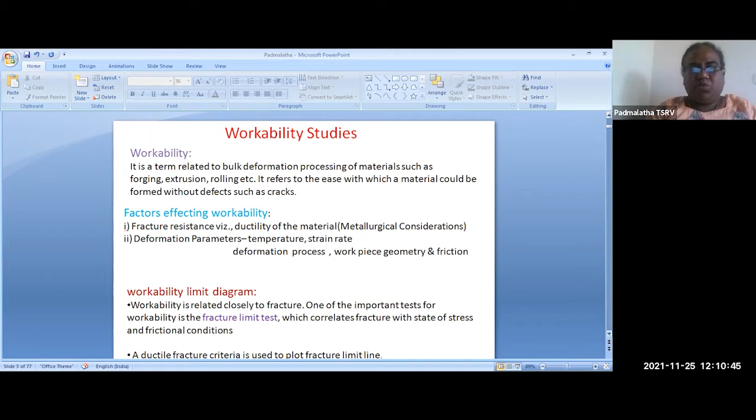So what we can do is keep some of the parameters constant, and check the workability of the material using a diagram called the workability limit diagram. The other name for workability limit diagram is the fracture limit diagram, because workability is closely related to fracture. We'll see how this workability limit diagram came into picture.

Workability diagram, or workability limit diagram, or fracture limit diagram, depends on a ductile fracture criteria. I will read it out and explain. This is the ductile fracture criteria given by Atkins. According to this criteria, it states that there exists a unique correlation between the tensile fracture strain and compressive fracture strain for a given material at room temperature. First I will explain this.

We have a material here. When you are compressing the material, it undergoes two types of strains: circumferential tensile strain and compressive axial strain. The circumferential tensile strain is called the hoop strain, and it also undergoes the axial strain. So the body is subjected to two types of strains, and when this body undergoes such deformation, it usually undergoes a non-homogeneous deformation.

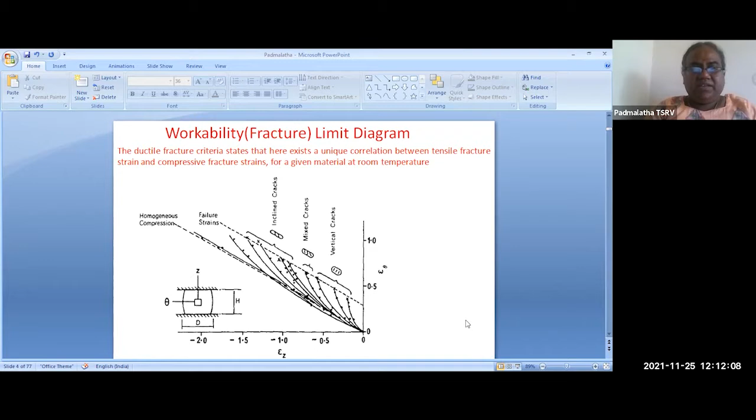So when it is undergoing such non-homogeneous deformation, the strains that the body undergoes also depend on its geometry. So why we are interested in geometry is, as we are changing the aspect ratio, the fracture conditions also will change.

It may undergo brittle fracture, it may undergo a mixed fracture, or it may undergo a ductile fracture. So as we change the aspect ratio of the component or the part, the fracture conditions also will change.

So for a given material at room temperature, if we keep changing the fracture conditions and plot all those fracture strains, where the y-axis is the tensile strain and x-axis is the compressive strain, we see that all these fracture points are forming a straight line.

That means there exists a unique correlation, a slope, between the tensile fracture strain and compressive fracture strain for a given material at room temperature.

So this line will help us. When we join all these points, we call this line the fracture limit line, or workability limit diagram. This line helps us in many ways. We'll now see its applications.

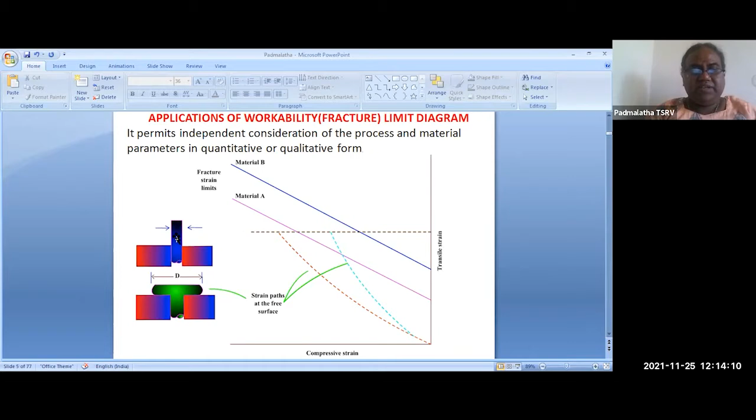We have a bar with us. This bar I'm subjecting to some compressive forces and some riveting operations. Say some riveting operation has taken place, and this bar is of a material. Before that, I want to tell one more thing.

These lines are all touching the fracture points. That means if the material is strained above this line, it will surely fracture. If the material is strained below this line, the material is safe. So it is a limiting line. Above this line means the material is unsafe, below this line means it is a safe domain.

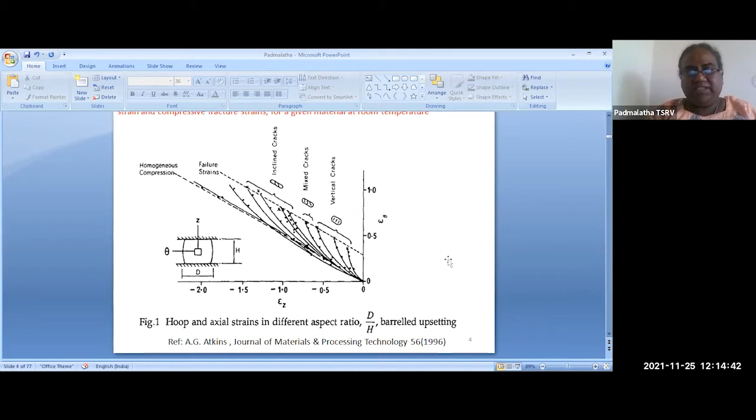Below this line we can strain the material, above this line we should not strain the material. Keeping that in mind, we'll go for this.

So here, when we are subjecting it to compressive stresses with some riveting operation, it undergoes two types of strains: one is the circumferential tensile strain and one is the compressive strain. Let us say during this operation the material undergoes a maximum tensile strain of this much.

Say this is the line which the material will undergo. We have assumed that this material is material A, and this purple line we are seeing is the workability limit diagram for material A.

Now you can see that when we have used material A, it is crossing the line. This horizontal line is the maximum, or the limiting, strain which we have given to the material.

So when we are using material A, we can see that the limiting or threshold strain the material is undergoing falls under the unsafe zone, because the area above this line is unsafe and the area below is safe. The maximum strain it undergoes falls under the unsafe zone, so we cannot use material A.

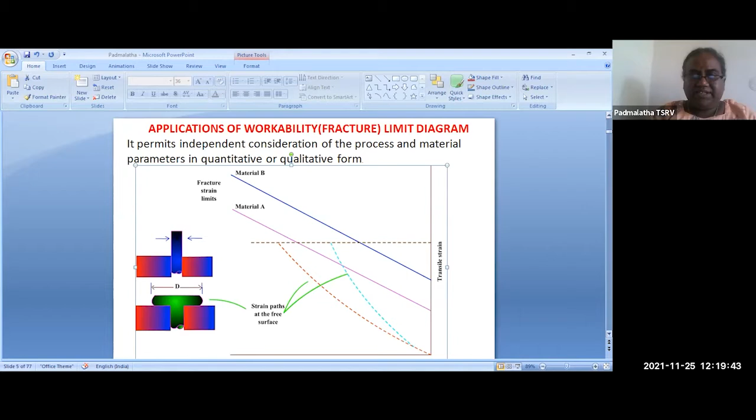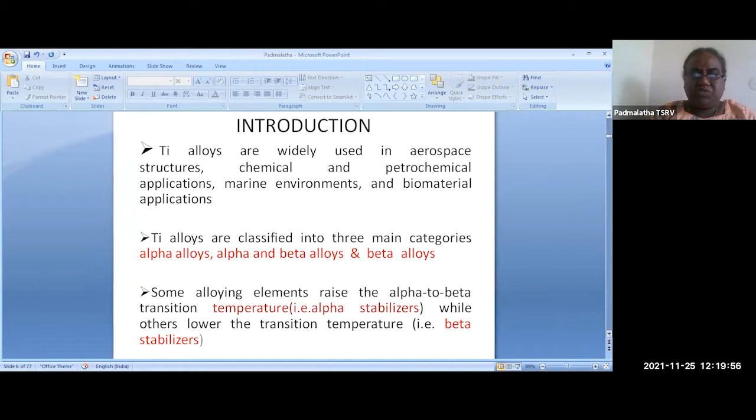And before that, I have worked out on metastable beta titanium alloys. This is the material I have chosen for my PhD work. So as a case study, I want to show you.

Mainly this titanium, like our steels, iron, exhibits a property called allotropy. Allotropy property means what? One metal exhibits two different microstructures - that is called allotropic nature. So some materials in nature will exhibit this, like iron, titanium, cobalt, and nickel. Some elements will exhibit such nature. For titanium, it exhibits HCP structure up to a temperature of 883, and above 883 it exhibits a BCC structure. BCC structure we call it as beta phase, and HCP structure we call it as alpha phase. This is for pure titanium.

So the transition temperature will change as we keep adding the alloying elements. Like steels, as they exhibit a different allotropic nature, we could make different types of steels. Likewise here, as titanium is exhibiting this allotropic property, we could make different types of titanium alloys. That means we can add alloying elements which will stabilize the alpha phase even at high temperature, and we can add BCC beta stabilizing elements which will stabilize the BCC even at lower temperatures. So by adding these alloying elements, what they do is they change this transition temperature.

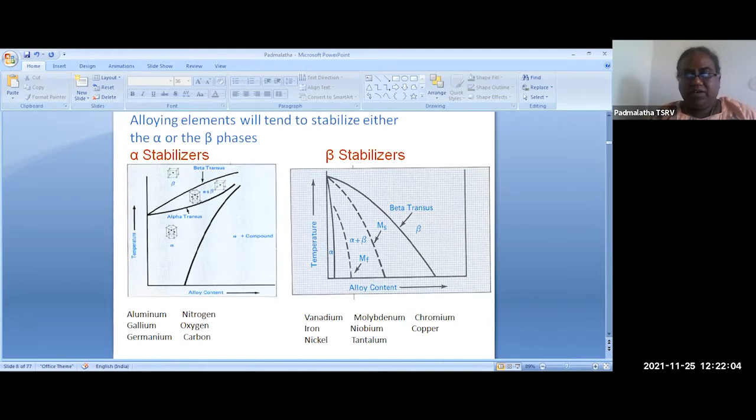So if you are alloying with alpha stabilizers - alpha stabilizers are mainly aluminum, gallium, nitrogen and oxygen - and beta stabilizers are vanadium, molybdenum, and chromium. If you are adding alpha stabilizers and getting the alpha microstructure even at higher temperatures, we call it alpha alloys. And if you are adding both alpha and beta stabilizer elements, and we can see both phases, it is called alpha plus beta alloys.

And if you are adding the beta stabilizing element, approximately 30% by weight, so that we can see even the beta phase at room temperature, those alloys we call beta alloys. And my work is on metastable beta alloys. Why we have taken this alloy is, here the beta alloying elements are added in the weight percentage of 10 to 15%.

But here we are using a term called metastable. Why metastable - though we are getting a beta phase, which is a high temperature phase, though we are able to get the beta phase at room temperature, it is metastable. That means if you give time for it, if you age it, again the alpha phase will try to precipitate in the beta matrix. This precipitation process actually gives the strength and hardness to the material, like precipitation hardening. This is one of the mechanisms which gives strength and hardness to the material.

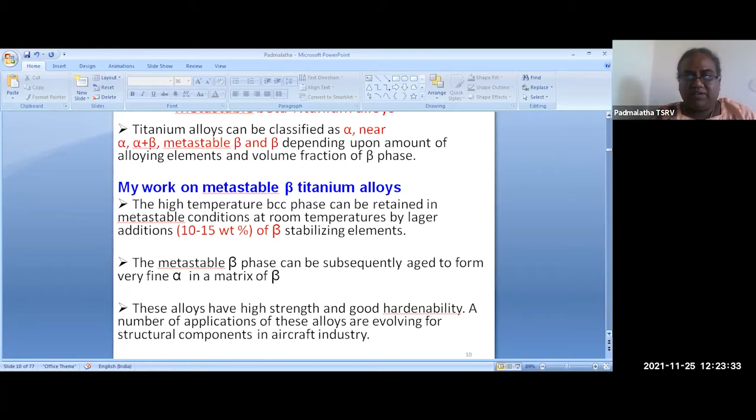So here my work is on beta alloys. Already these beta alloys are discussed in detail by scientists from DMRL, so we'll not go into it, but we'll mainly focus on workability and hot working behavior. So these are the alloys - I have taken 2 alloys, okay, we'll focus only on titanium 5553, which is a metastable beta titanium alloy.

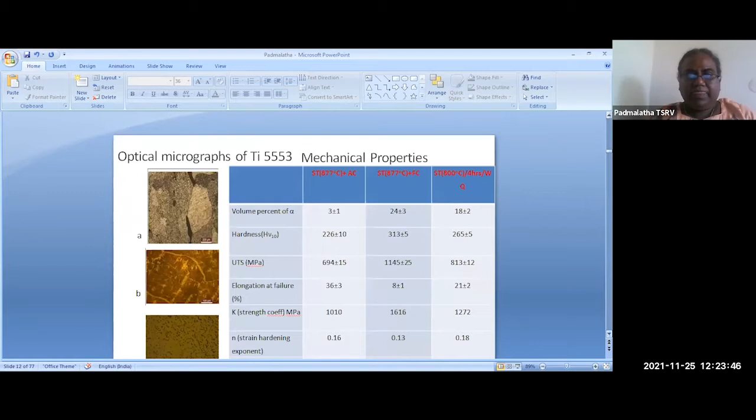I have subjected the same alloy to 3 different heat treatment conditions. By subjecting it to these 3 conditions, we can clearly see how the properties are changing. As we all know, by the annealing process, that is furnace cooling, the material usually becomes soft. But in this case, the strength of the material is increasing.

Why? Because during furnace cooling, we are giving enough time for the alpha phase to precipitate into the beta matrix, since this is a metastable beta alloy. So the beta will not remain as it is. Slowly the alpha phase precipitates into the beta matrix, which gives this much strength to the material.

Why we have taken these 3 conditions is just to check the workability. We have taken 3 different conditions, but we mainly focus on workability.

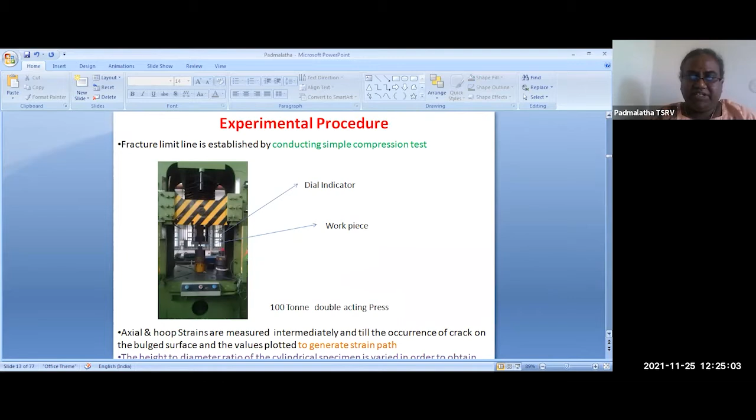So we came to a conclusion that we have to plot a workability limit diagram. For plotting the workability limit diagram, we need to perform a simple compression test at room temperature. Here we can use any press, any single acting press is okay.

What we have to do is press the material till it gets cracks, and we should not continuously press the material. We should compress it in intermediate stages, because each time after a little compression, we have to take it out and measure the hoop strain and axial strain, then keep it again, and again measure the hoop strain and axial strain, till the material gets fractured.

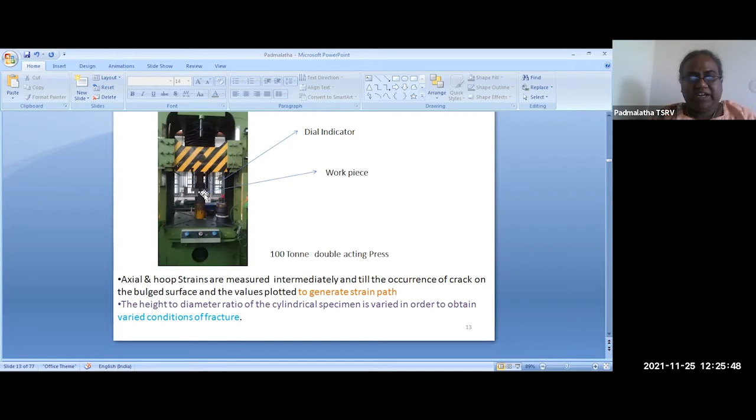Why we are doing this is we want to see how the material is being strained throughout the process. The workability limit diagram is drawn for different fracture conditions.

So to get different fracture conditions, we are going for different aspect ratios of the workpiece. We are changing the different H/D ratios for the samples, so that we get different fracture conditions, letting the material fracture in any way.

The workability limit diagram gives the safe zones and unsafe zones. So we have to look for all the different modes of fracture. That is the reason we have gone for different H/D ratios, to generate different fracture conditions.

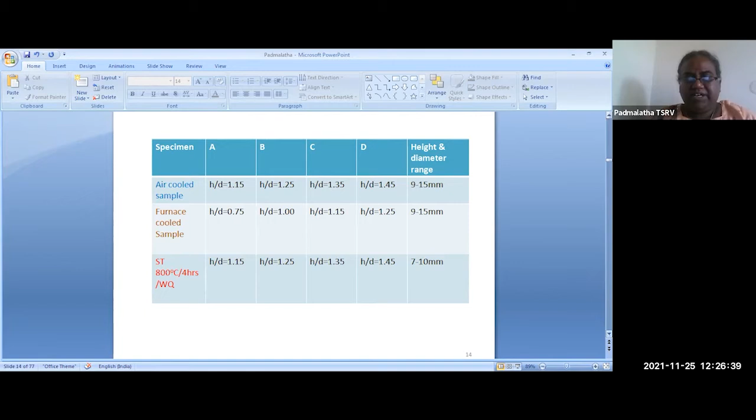After that, we have to keep the material and keep measuring, so we have taken different H/D ratios. You can see different diameters and different heights, because each material will fracture differently depending on its H/D ratio.

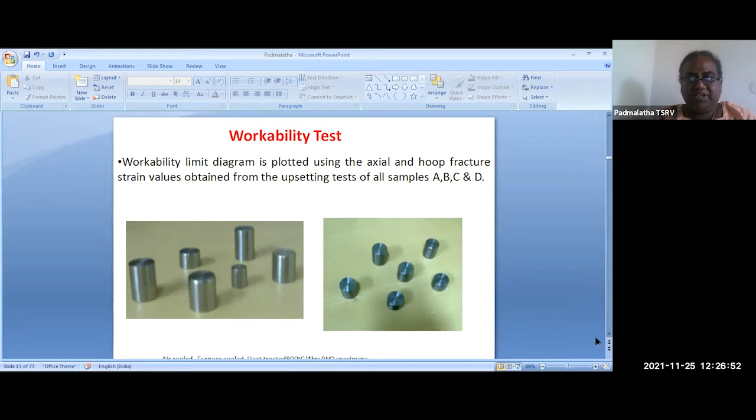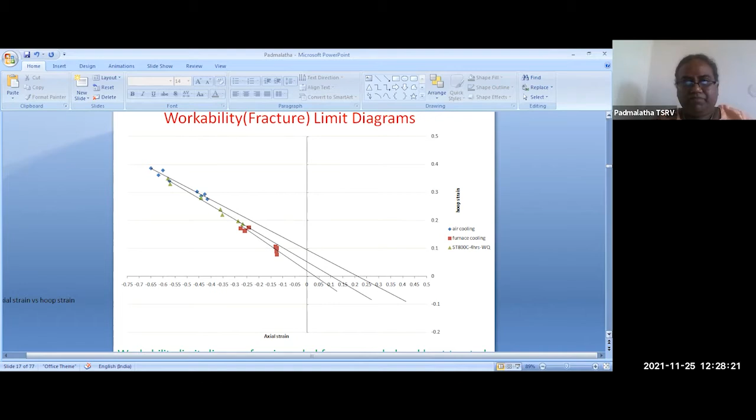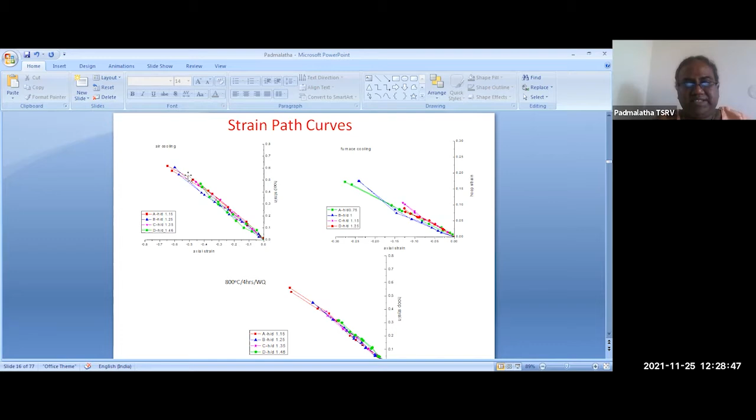The data comes from the strain path curves. For drawing the workability limit diagram, fracture strains are enough, but while the experimentation was going on, we took the strains at each intermediate stage, and used those to plot the strain paths. The slope of these strain paths can be used for estimating the stresses the material will undergo, such as the biaxial stress it undergoes during compression.

That is the circumferential stress it will undergo, and it will undergo the axial stress. So these stresses we can estimate using the slope of the strain paths. Beta is nothing but the hoop strain divided by the change in axial strain.

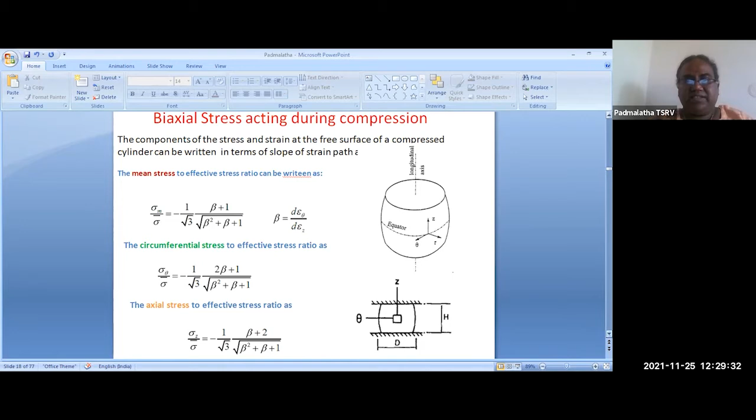These are the relations that are already available. So we can use these relations to calculate the stresses the material is undergoing during the process. We can calculate the axial stress, circumferential stress and mean stress, and we can plot the stresses.

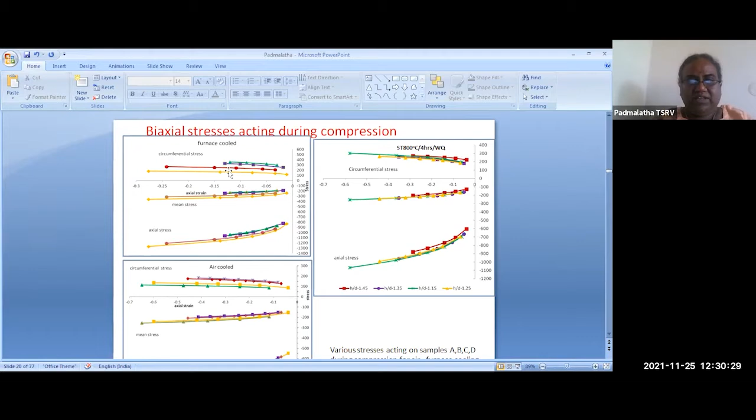So the strain it is undergoing is very little. As the tensile stress is more in the material, deformation is limited by the tensile stress, meaning it is cracking earlier. So the values that are given are correct.

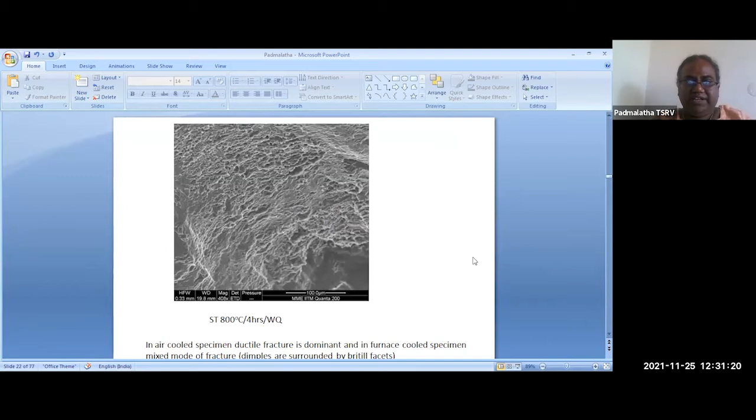And in the solution treatment sample, we can see both the flat facets and the dimples also, which indicates a mixed mode of fracture. So a simple test we can perform at room temperature, and we can plot the workability limit diagram.

Also, without doing the experiments, we can simulate the process. But when we are simulating the process, the finite element programs will check our material with respect to some ductile fracture criteria. So we have to see what ductile fracture criteria these finite element computer programs adopt, because there is no unique fracture criteria suitable for all materials.

There are many ductile fracture criteria proposed by scientists, but we have to check their validity before using them in our finite element computer programs, whether they will suit our material or not. There are many ductile fracture criteria available, depending on different assumptions.

We have the Freudenthal fracture criteria, which is based on the assumption that whenever the total strain energy to fracture reaches a critical value, a crack will occur.

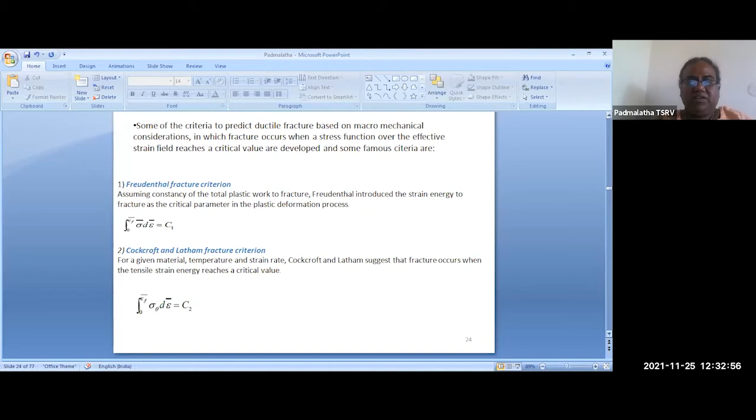And the Cockcroft model is based on the assumption that whenever the tensile strain energy reaches a critical value, fracture will occur. These are the different assumptions made by different scientists, so whether these assumptions will work out for our material or not, we have to see.

In the Brozzo criteria, they have adopted a stress function which consists of both the maximum tensile stress and the mean stress, and when this function reaches a critical value, fracture will occur. This is the assumption of Brozzo.

And Oh and others have assumed that the ratio of the maximum tensile stress to effective stress, when it reaches a critical value, fracture will occur. So these are the different assumptions, and there are many more. Apart from these, there are some 20 to 30 different new fracture criteria already available.

But we have considered only 4 of these fracture criteria, and we have checked which fracture criteria is suited for our material.

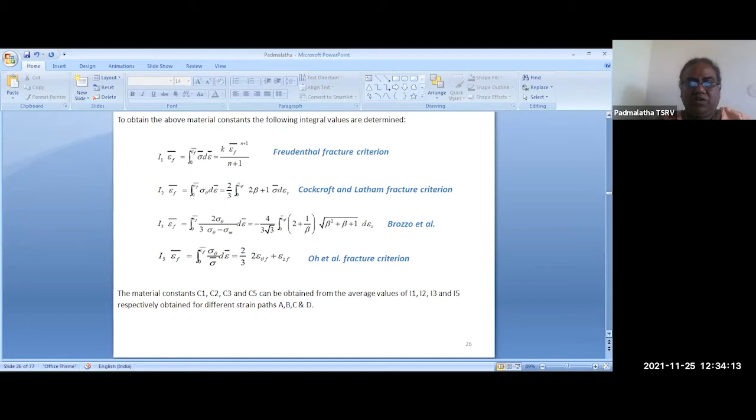Using these, as I told you, the slope of the strain paths can be used not only for calculating the circumferential stress and the biaxial stresses, but also to estimate the theoretical fracture strains the material will undergo. By using these equations, we can calculate the material constants, and then use those material constants to generate the theoretical fracture strains.

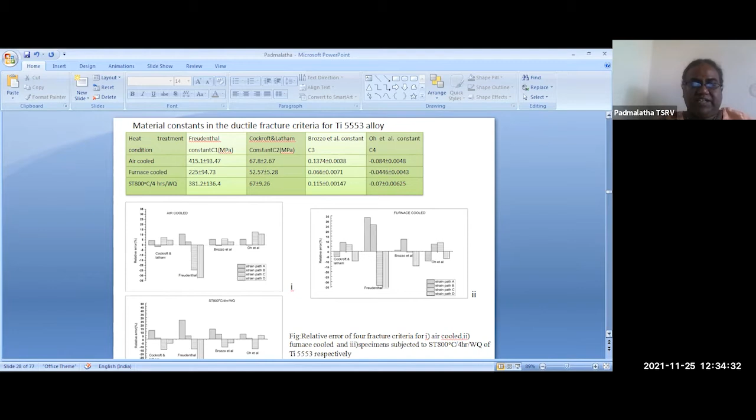So once the theoretical fracture strains are generated by these criteria, we can check with our experimental values whether the theoretical strains and the experimental fracture strains are the same or not. We can check by plotting the relative error curves.

From these error curves, we can see that the variation with respect to the Freudenthal criteria is very high, meaning there is a large variation between the theoretical and experimental values. So we cannot incorporate this Freudenthal criteria in our finite element programs. We can use the other criteria which give a variation of plus or minus 17%.

Either the Cockcroft or the Oh criteria we can use.

This is a simple area; we can easily work, everyone can work by using just a press, with no dies also required. If we have a single acting press, that's enough. We can plot the workability limit diagrams.

For different treatments, we know that workability limit diagrams are related to fracture, and fracture in turn is related to the ductility of the material, which in turn relates to the microstructure. So we can subject materials to different microstructures and plot the workability limit diagrams, thereby checking how workability is related to microstructure.

Here we have checked the effect of volume fraction of alpha on the workability of the material, and we have seen that as the alpha volume fraction increases, the workability decreases, because alpha is our HCP phase, that is hexagonal close packed phase, which is a very hard and brittle phase. So as this phase increases in the material, the workability decreases because the ductility will be poor.

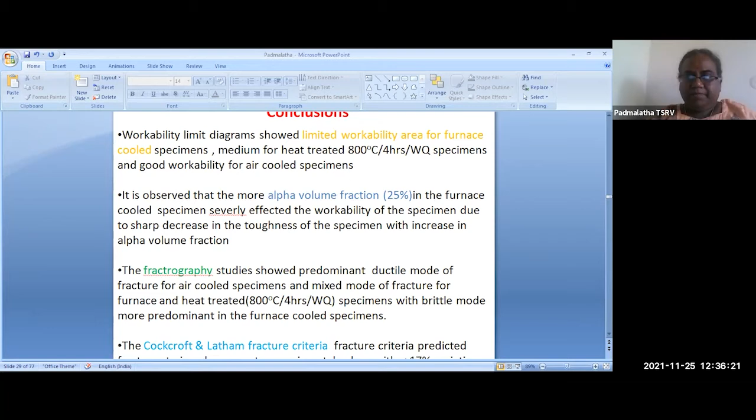So it's a very simple test, we can work it out in our labs. And the next part which we are dealing with is the hot working part.

In cold working, what happens is only the dislocation density will keep on increasing in the microstructure, and as the dislocation density increases during cold working, the material will be strain hardened and we cannot further work on it.

But when we go to the hot working process, there is a totally different phenomena happening in the microstructure, because also in cold working, the strain rate sensitivity is very less. Whatever strain rate we use, there is not much change in the flow stress.

But when we come to hot working, strain rate sensitivity is a very important parameter, because as we increase the strain rate, the flow stress also increases. So here we have two major factors, that is temperature and strain rate.

And the phenomena going inside the material during hot working is also different, because as it is thermally heated, the thermal heating will activate the phenomena called recovery and recrystallization, since hot working is nothing but working above recrystallization. So here the two phenomena will occur, that is recovery and recrystallization. We'll actually see what recovery and recrystallization are, and then come back to this.

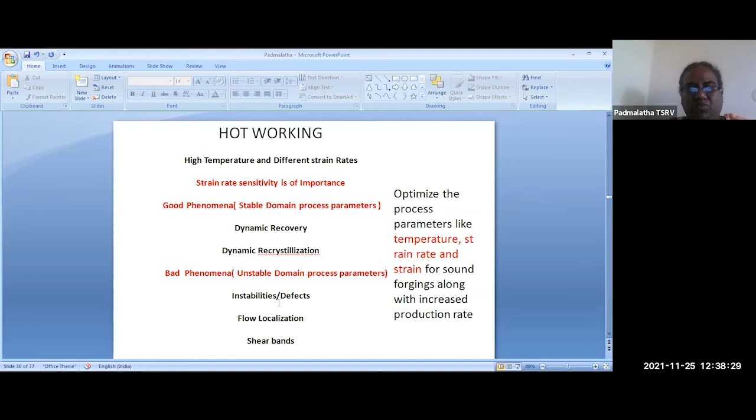Not only this, because of the different strain rates and temperatures we'll be using, we'll be processing the material under non-equilibrium conditions. Thereby, it may undergo some microstructural defects also, like flow localizations, shear bands, deformation bands, and cracks.

So here, why we are checking into the hot working behavior is, we are trying to optimize the process parameters like temperature, strain rate, and strain, so that we can generate sound forgings with increased production rate. We cannot increase the strain rate to increase production rate, and we cannot increase the temperature to get more strain, because along with the good, stable phenomena, these defects will also occur internally inside the microstructure.

So we have to see the domains, I mean the range of process parameters where we can get the sound forgings. That domain we call the stable domain.

So before going to all this, we'll just recap about recovery and recrystallization. Though you all know it, just I am interested, because you may not be interested in my work. So we'll just go through recovery and recrystallization, and then move on to the case study.

So the material in hot working undergoes two phenomena called dynamic recovery and recrystallization. Why we call it dynamic is because during working, the material is undergoing these phenomena, so that is why it is called dynamic.

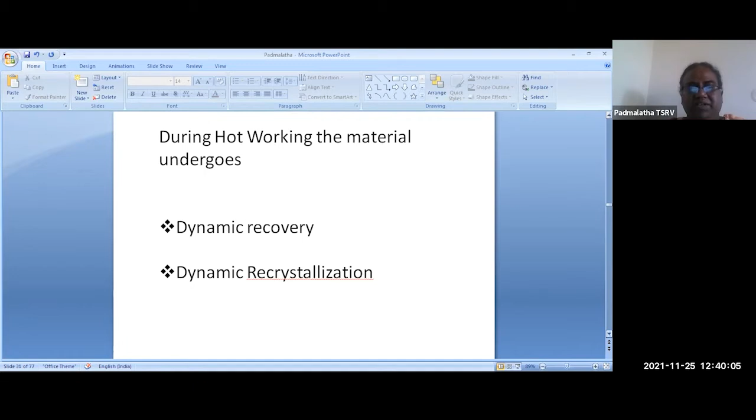So we'll just recall what we know about recovery and recrystallization, and then go to the case work. In cold working, we know that the dislocation density increases, thereby the strength of the material increases, and we cannot further work on the material. So we'll anneal the material. When annealing, two phenomena happen, that is recovery and recrystallization. We are providing some thermal energy for these things to happen, and also the stored energy, which is in the form of dislocation density.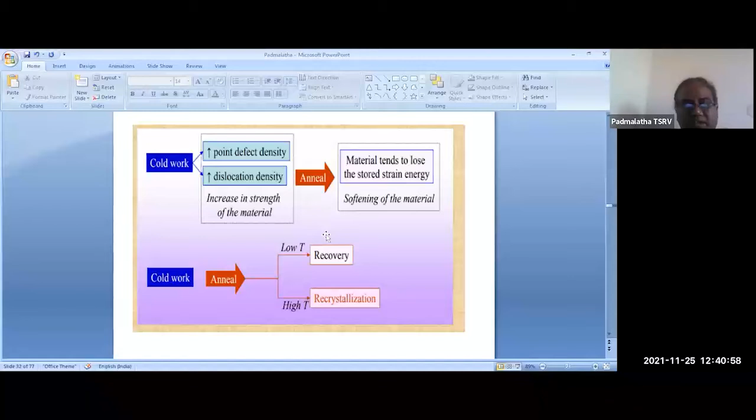So these two, recovery and recrystallization phenomena, happen during annealing. So what is recovery, we'll see, and the driving force behind recovery.

The driving force behind recovery is the stored energy, which is in the form of dislocation density. Always the material wants to lower its energy. Whenever the material has low energy, it is a stable, stable region. Always, whenever it frees its energy, it will try to free its energy so that it can come to a stable state.

So recovery is the phenomena where it will release this energy, which is stored in the form of dislocations, by a process called recovery. And recrystallization usually takes place at a little higher temperature compared to recovery, and afterwards it will further try to lower its energy by decreasing the number of grain boundaries. We'll see one by one.

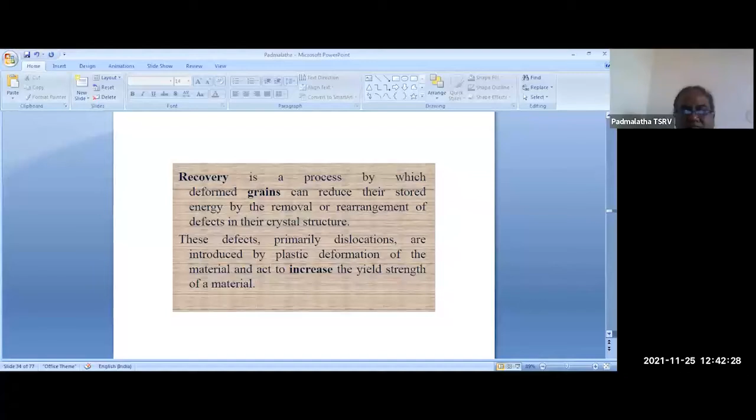So what is recovery? It is a process by which deformed grains can reduce their stored energy by the removal or rearrangement of defects. We know that dislocations are the primary reason for the deformation of the material, and during recovery it is trying to annihilate the dislocations.

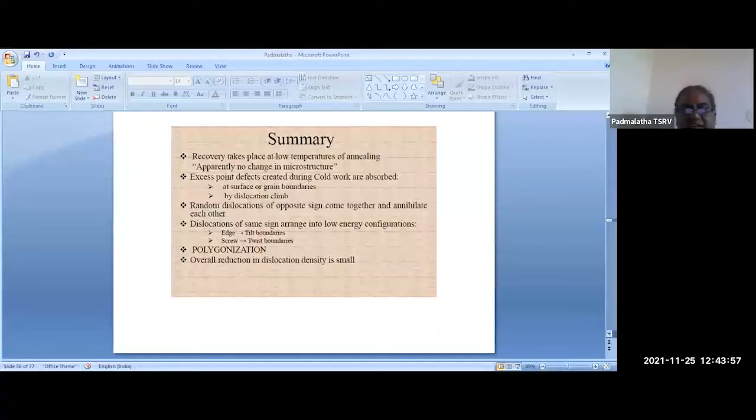So here it is trying to free up the energy by movement of dislocations in such a way that the dislocations are annihilated. The dislocation density is decreased. During the recovery process, the dislocation density is decreased, and also these dislocations are arranged in an array, in a pattern, in an organized way, thereby trying to get to a stable state. This process is called recovery process. Here the dislocation density decreases, but not much changes happen in the microstructure. Only the dislocation density decreases and the dislocations are arrayed.

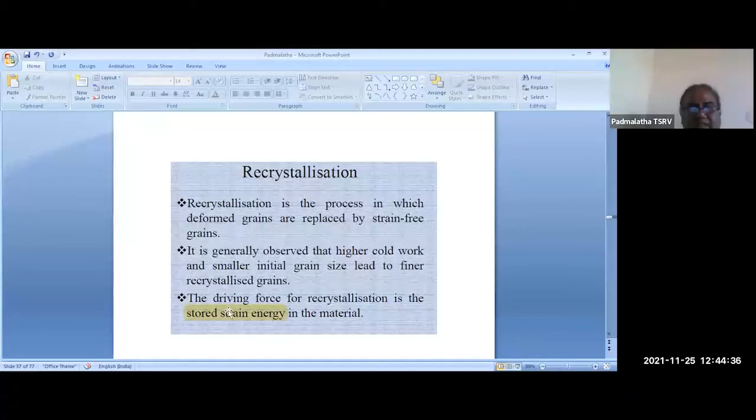Now we'll go to another process called recrystallization. Recrystallization is a process of formation of new strain-free grains. The grains which are being nucleated are strain-free, and the thermal energy that is given will help the material undergo this process. The driving energy for recrystallization is the stored energy in the material, mainly whenever the material undergoes cold working, that material is much suitable for recrystallization purpose.

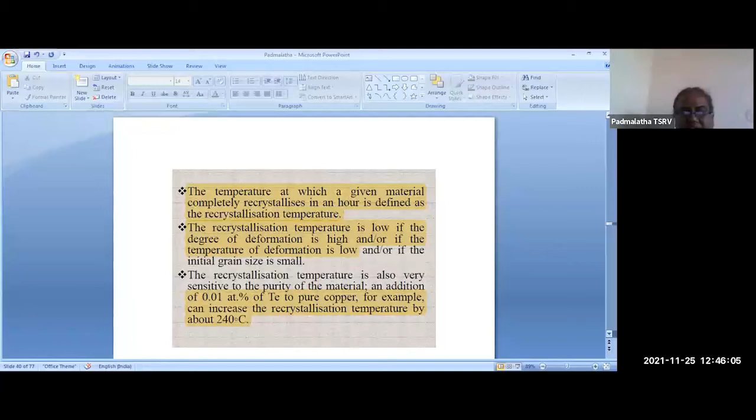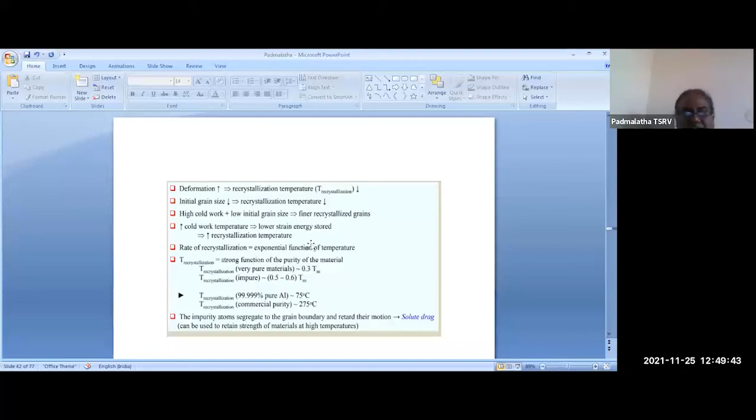So we have to always search for the optimum regions where these stable phenomena will happen. This is not of much importance for us right now, but it tells us that recrystallization temperature is a function of the amount of cold work, grain size, and also depends on impurities. We'll not discuss much on this.

So we have seen that whenever recrystallization and recovery happen, the ductility and formability of the material increases, and we can easily deform the material with less force.

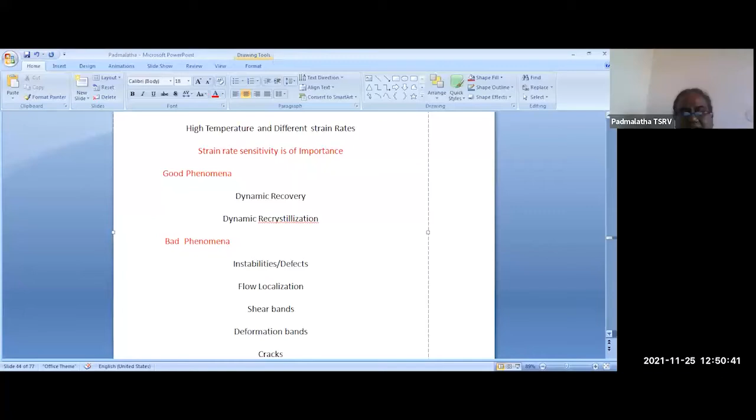So the good phenomena are dynamic recovery and dynamic recrystallization. But strain rate has a major role to play. If you go for higher strain rates, the process is much in non-equilibrium conditions, and because of that, instabilities may occur inside the material. We should see that these instabilities are minimized or avoided, like flow localization, shear bands, deformation bands, cracks, at the outer surface.

The forgings may look sound on the outside, but when we check the inside, these phenomena would have occurred inside the microstructure, and they will reduce the service life of the forgings.

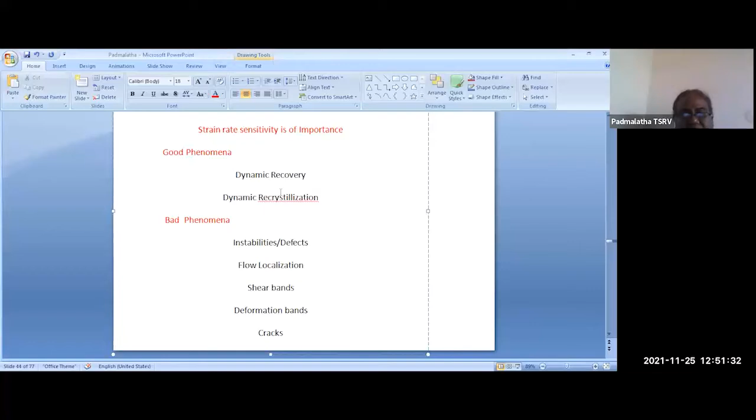That is why we should choose the domains, meaning the process parameters, such that dynamic recovery and dynamic recrystallization, the good phenomena, will happen, and such that the bad phenomena will not occur in our material.

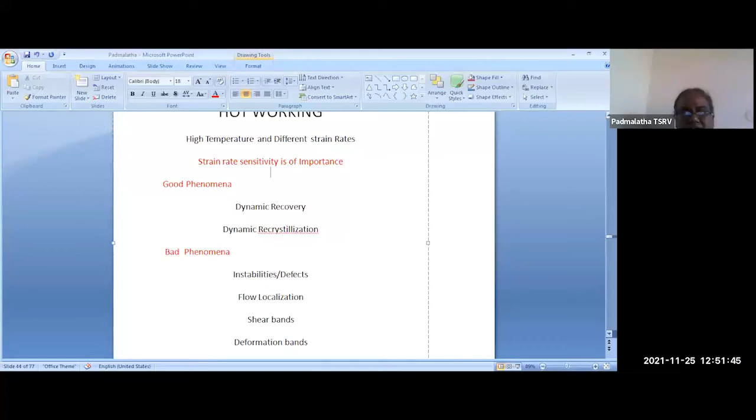Mainly, strain rate is very important, and temperature and strain rate are the parameters which play a major role in the change in microstructure during hot working. So the hot working deformation response of metallurgical materials is strictly correlated to their initial microstructure as well as to the changes occurring during deformation at high temperature.

So the initial microstructure will also affect the deformation, and also the changes. I told you recovery and dynamic recrystallization, all this will happen during the hot working process.

The parameters which we should take control of are temperature and strain rate. The high temperature deformation acts concurrently with the other control parameter, the strain rate. So these are the parameters which we have to take very much in control to control the microstructures that are occurring within the material.

To get information about what is happening in the material, we should analyze the stress strain curves, obtained at different temperatures and strain rate levels. Stress strain curves are nothing but flow curves. If we analyze the flow curves generated at different temperature and strain rate, this analysis will give a lot of information of what is happening inside the material during deformation.

That is why I am presenting a case study here where we tried to generate these flow curves at different temperature and strain rates, and we have studied these flow curves and how we could use them to give a lot of information. We'll see in further slides, using a case study from my PhD work.

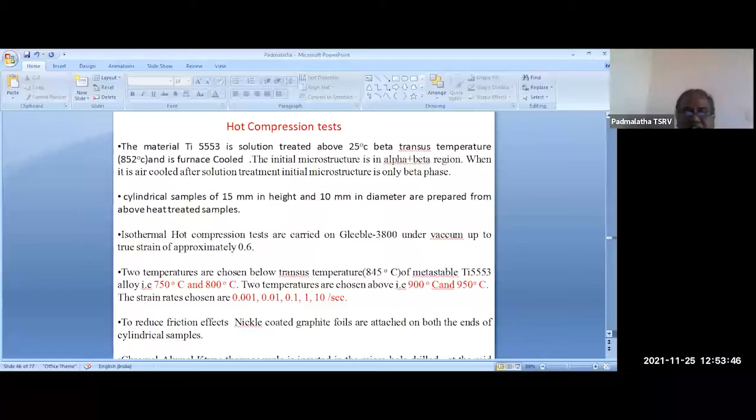To generate the flow curves, we conducted tests called hot compression tests. These are isothermal compression tests. For that, we conducted tests at 4 different temperatures: two above the beta transus temperature and 2 temperatures below the beta transus temperature. And we have chosen 5 strain rates.

The isothermal hot compressions were done at a particular temperature with a particular strain rate. So 4 into 5, that's 20 samples per one heat treatment, for one heat treatment we have conducted.

The sample sizes we have taken are very small samples only, and the whole test is conducted using a Gleeble 3800 simulator. This is a thermomechanical simulator where we can maintain the constant strain rate.

A feedback loop is required to maintain a constant strain rate, and that feedback loop is taken care of by the Gleeble thermomechanical simulator. Keeping the temperature constant is also taken care of by the Gleeble simulator.

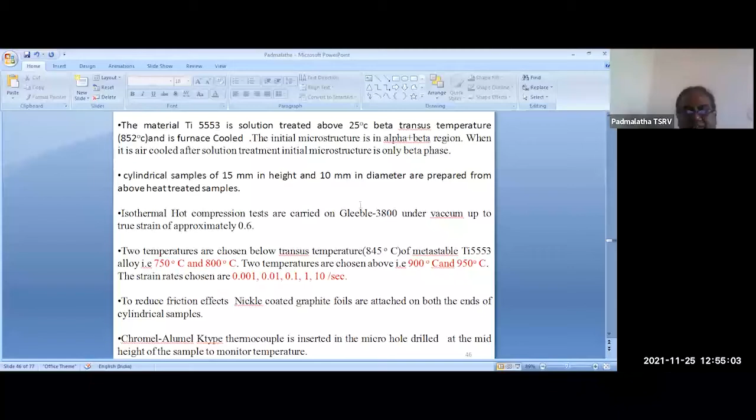So this machine is taking care of all the constant temperature and strain rate requirements. We should not worry about how to keep constant temperature, and we should not worry about how to keep constant strain rate. Everything is taken care of by the machine itself, so our work was done very easily.

After we have strained the material to about 60%, once the straining is finished, we have quenched the material so that the deformed microstructure is retained. And this is the setup.

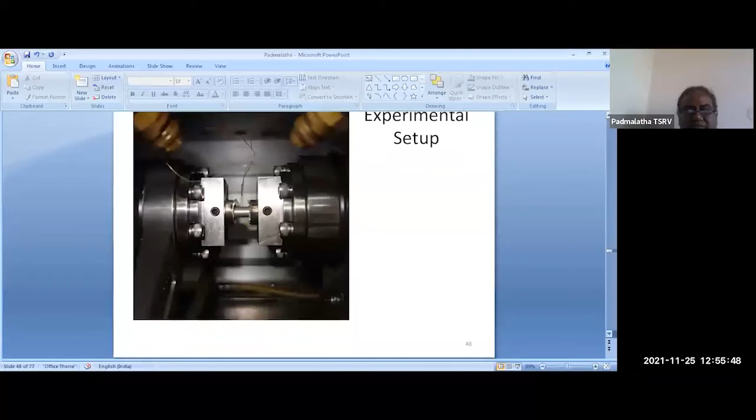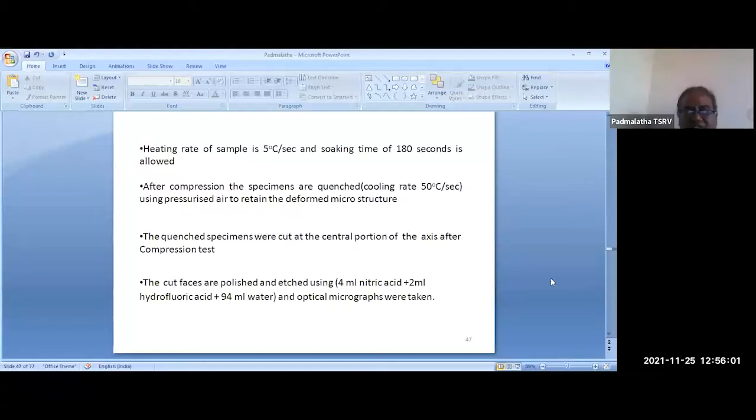By induction, by resistance heating, we have heated the material, and the heating rate is 5 degrees per second, and we have soaked it at a particular temperature. We soaked it for 180 seconds so that the entire material is uniformly heated up.

After that, we have conducted the compression test, and we can give the strain we want. We have given a strain of 0.6, so we have strained up to 0.6, and the strain rate also we can control here. The strain rate is given and the strain is given, and once the material has reached the particular strain, the machine will automatically quench the workpiece, and we can take out our workpiece.

I told you that the initial microstructure will also affect the deformation behavior. So as a case study, we have taken two initial microstructures: one is the beta microstructure and one is the alpha plus beta microstructure. This is the main important point for us.

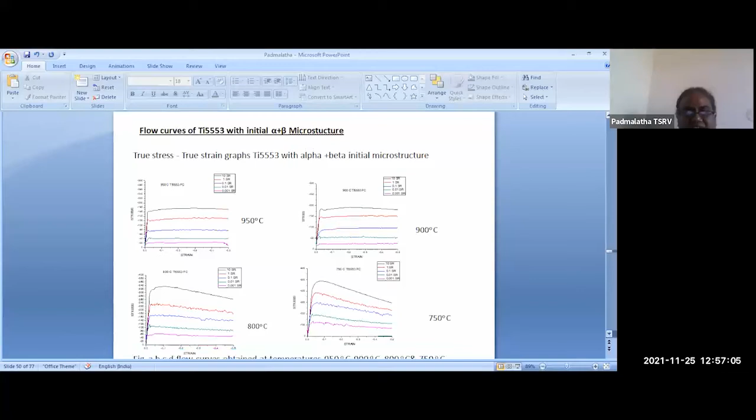These are the flow curves that are generated by the machine at different temperatures and different strain rates. The red color, black color, and blue color represent different strain rates. From all the curves, we can see that as we are increasing the strain rate, shown in black at 10 per second,

as we are increasing the strain rate, the flow stress is increasing. And also we can see that as the temperature is increased, the flow stress is decreasing. That is the two major points, which is obvious.

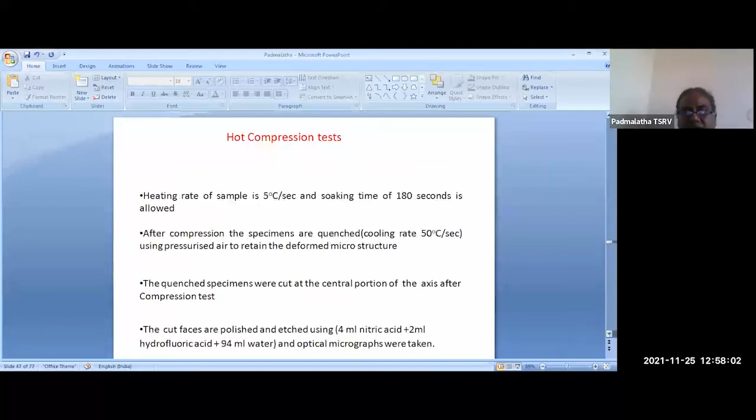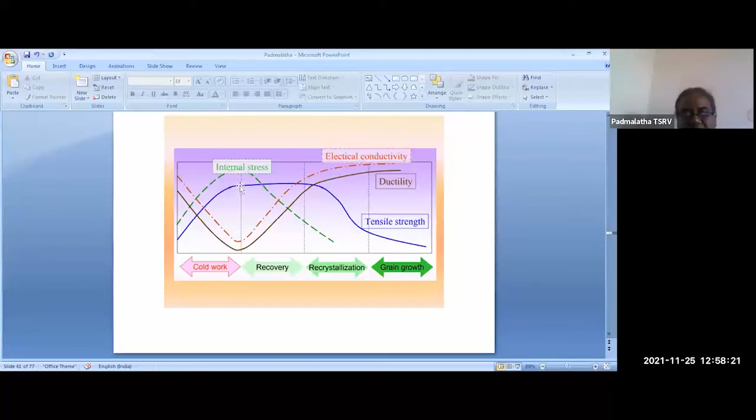So if the flow softening is occurring like this, it indicates that some recrystallization is occurring there. And when the flow stress is constant like that, it indicates the material is undergoing recovery.

It is just a general understanding. It is not a rigid rule. It is just for general understanding.

We usually assume that if the flow curve is after initial strain hardening, if the stress is constant, we consider it as a recovery region. And if the flow stress is decreasing with increase in strain, then we consider that the material is undergoing recrystallization.

So this is just a hint for us. You can just call it a hint. So we'll come back to our work.

So here you can see there is a decrease in flow stress with increase in strain. So we can assume, at the initial stages, that recrystallization would have happened during this region. And when the flow stress is constant, we can assume that recovery would have happened.

These are just our assumptions, and we have to validate them with the microstructures, which we have to take by cutting the deformed samples at that particular temperature and strain rate.

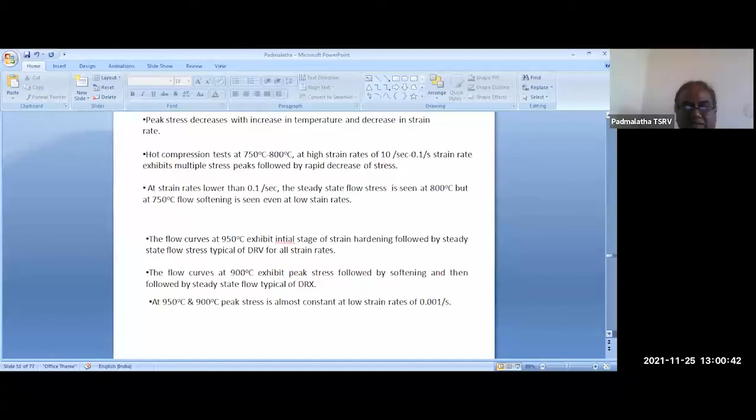So we'll not waste our time dealing with mathematical models, because mathematical models always come with some assumptions. Here we use the Zener-Hollomon parameter, which correlates temperature, strain rate, and the deformation behavior, and we could generate mathematical models from that.

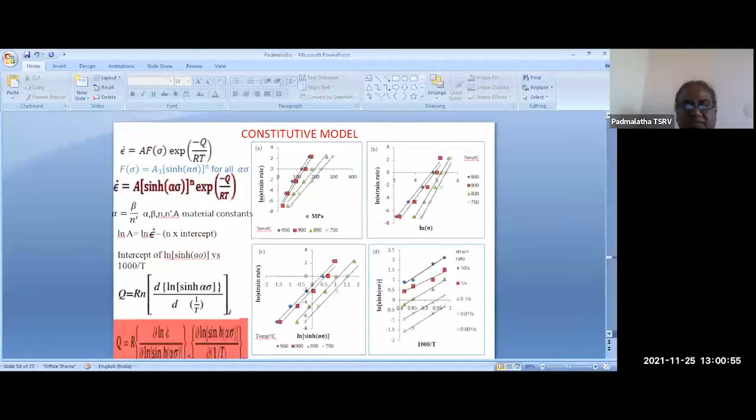And they all come with some assumptions, and sometimes our experimental values may be in close relation with the theoretical values predicted by the mathematical model, but this is not of much importance for us. We'll just directly go with the processing maps, because this is really what is happening.

So we'll mainly go with processing maps. I think most of you know a little about it, so that is why I'm going directly to the processing maps.

So what is a processing map? Here we have obtained a lot of data from flow curves. We can find out the strain rate sensitivity, the temperature sensitivity, everything we can find out from the flow curves. So once we get the data from the flow curves, we can plot a map called processing map.

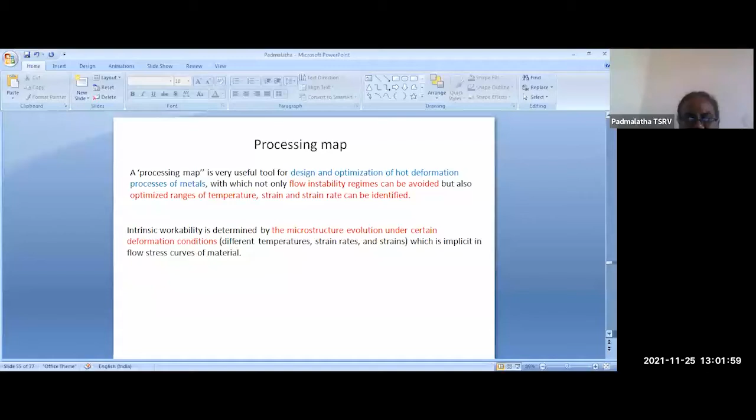So what is this processing map? We'll see first. This processing map is based on a model called dynamic material model. So based on this model, this processing map...

Once we generate this processing map, we can find out what are the stable domains and what are unstable domains. Domains are nothing but process parameters, so we can directly get the stable processing parameters.

We can make the material hot work, and we can also see the unstable parameters where we should not make the material hot work. So that is given by the processing map. So how does it give that? What is it based on? We'll see.

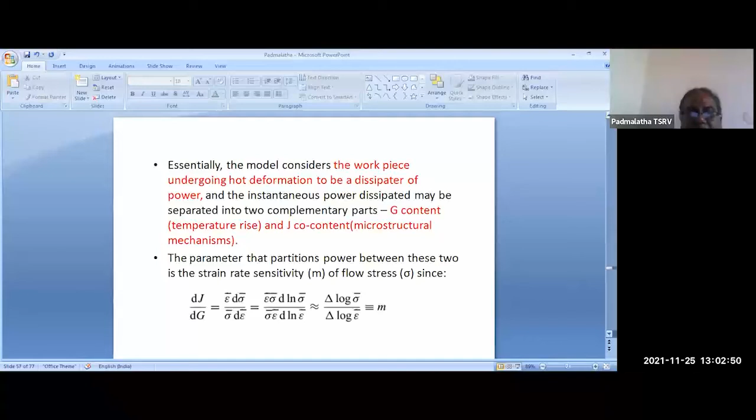So mainly, in this model, it will consider the workpiece as a power dissipator. Whenever we work upon the material, the temperature will rise in the material. See here, this is the flow curve.

And when we work upon the material, here you can see the flow stress and strain rate curve, and the area under this curve is nothing but the total power, that is flow stress into strain rate. So we can take the material as a power dissipator.

Our component itself we can assume as a power dissipator, and it will dissipate the power in two ways. One, in the form of heat — the material gets heated up. So in the form of heat, it will dissipate the power.

The material will dissipate power through microstructural changes. It can use this power to undergo microstructural changes. So we can divide the total power into two components: the power used for microstructural changes, and the power used for heat conduction. J is the parameter representing the power used for microstructural changes, and G is the power conducted in the form of heat.

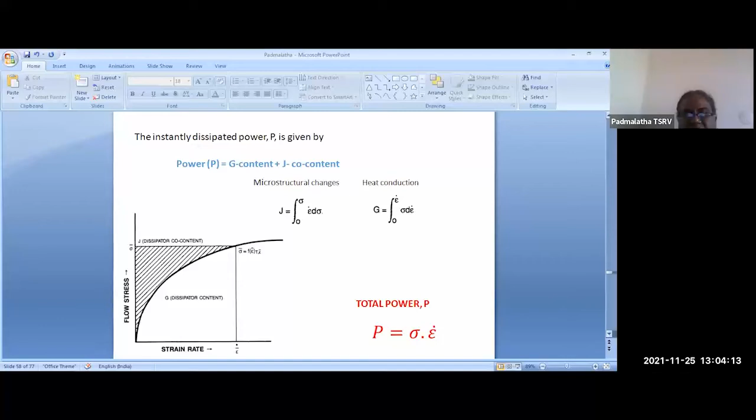If we relate these two, we can find what fraction J is with respect to the total power released. So dJ by dG, the ratio of dJ by dG, comes out to be almost equal to the strain rate sensitivity. Strain rate sensitivity is a major parameter which tells us about the hot working behavior of the material. So it is a very important parameter because the ratio dJ by dG comes out approximately equal to M, the strain rate sensitivity.

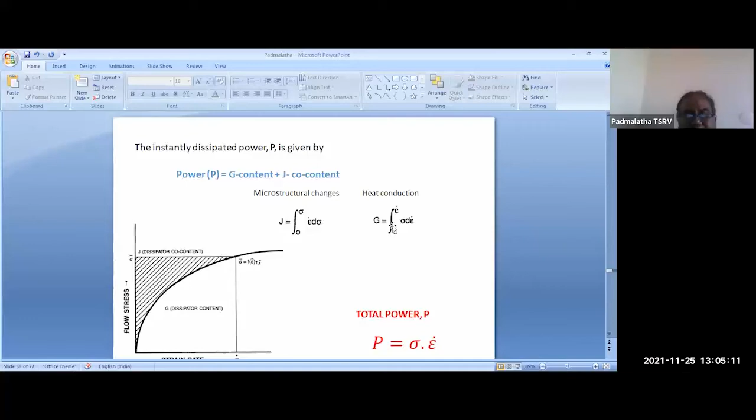After the total power is generated, if most of it goes into making microstructural changes, then it is good for the material. If most of it is conducted away, then it is not good. According to this, the material model has been developed. So the fraction of power dissipated with respect to the total power, we call the efficiency of power dissipation.

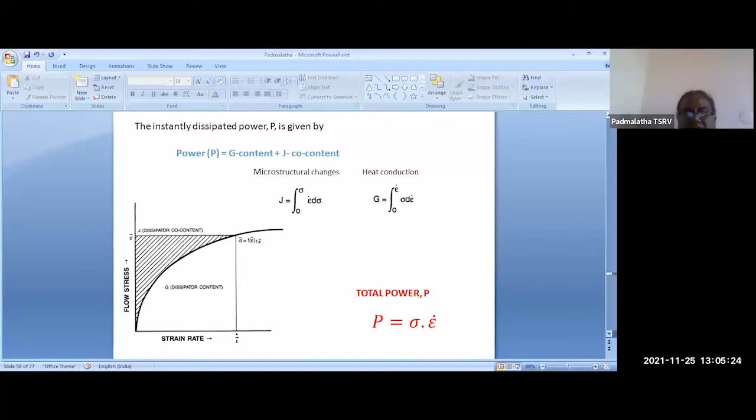Efficiency of power dissipation totally relies on a parameter called strain rate sensitivity. So if this power dissipation is high, those domains are favorable domains for us, because most of the heat energy is used to make the microstructural changes in the work, which is of use to us.

Not only the efficiency factor, but they have also floated one more parameter called the Zeta factor. This Zeta factor is also a function of strain rate and strain rate sensitivity. Whenever this factor is negative, it shows the unstable regions.

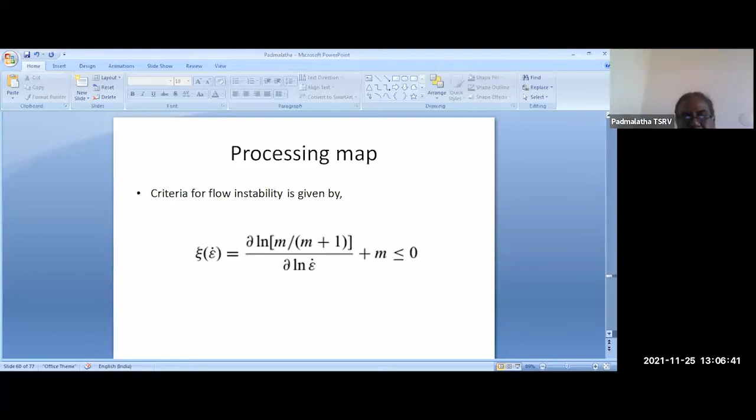So here we have two factors: one is the efficiency factor, and one is the Zeta factor. The Zeta factor tells about instability, and the efficiency factor tells about the stable domains. If we include both factors in one map, that map is nothing but our processing map. Here we superimpose the instability map over the power dissipation map to get the processing map. This model has been used for more than 10 years, and these process maps are working very well.

The information we get from microstructures and the information we get from processing maps almost go hand in hand. So the information given by the processing map, we can actually believe, because the M values and other values are generated from experiments only.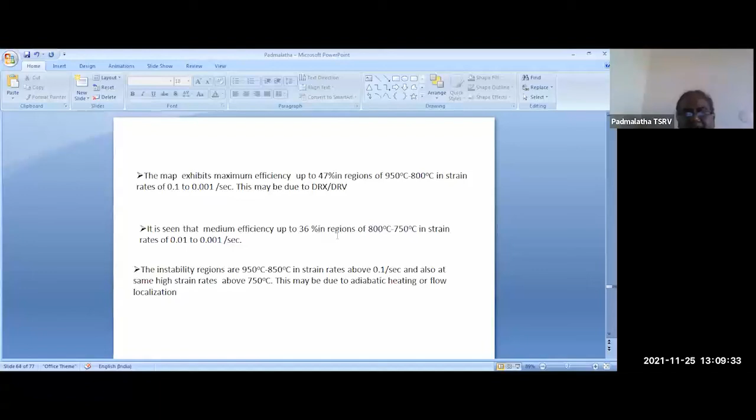So we have checked that for higher strain rates and higher temperature ranges, it is showing some instabilities. So we'll check whether the information given by the processing maps is correct or wrong.

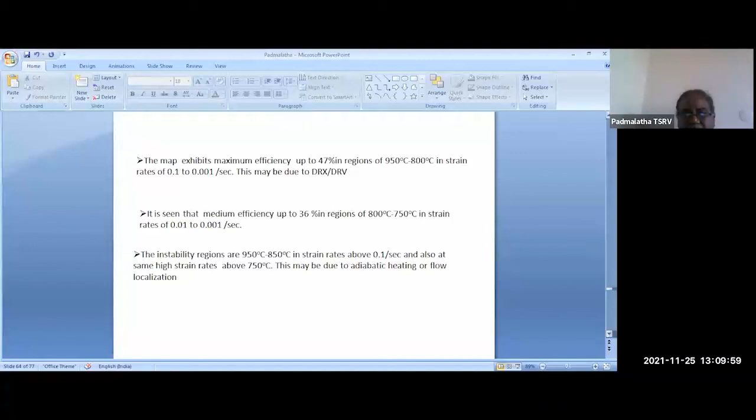by microstructural evaluation. When we went for microstructural evaluation at low strain rates, we have seen irregular grain boundaries and small recrystallization grains also. All these irregular grain boundaries and elongated grains are typical of DRV, dynamic recovery. So the dynamic recovery phenomena is happening inside the material, and these serrated grain boundaries indicate that dynamic recovery is happening, which is good for us.

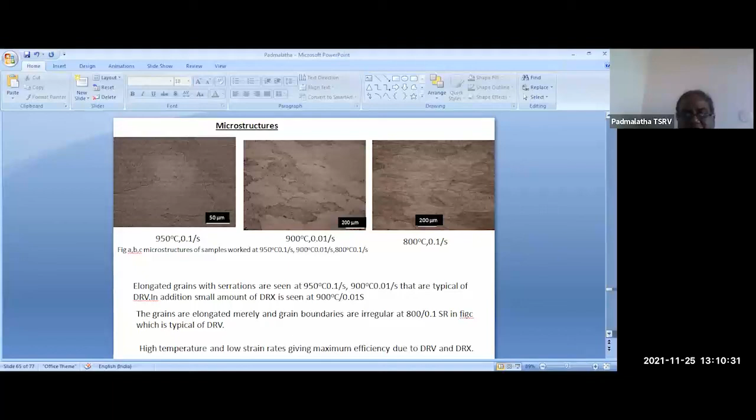So these are the safe regions. But at higher strain rates, we can see some flow localization. Small new grains are formed, but they are formed locally. Not the entire structure is made of small recrystallized grains, but these small recrystallized grains occur only at particular locations.

This has happened because we are working the material at a higher strain rate, so we have not given enough time. The entire process is a non-equilibrium process. At some regions only the material would have been heated up, some adiabatic heating would have taken place at certain points. For titanium, the thermal conductivity is also less, so because we didn't give enough time for the heat to distribute throughout, at some points only the localized heating would have happened.

And here only in some localized areas the deformation behavior is changing, so we call this condition flow localization, meaning the flow is localized in some areas. In this area only we have seen the recrystallized grains, and when recrystallized grains occur in this area, that means the ductility is very good in these regions, meaning much stress is not required for the material to undergo further strain. So earlier we saw in flow stress maps, when the flow stress is decreasing...

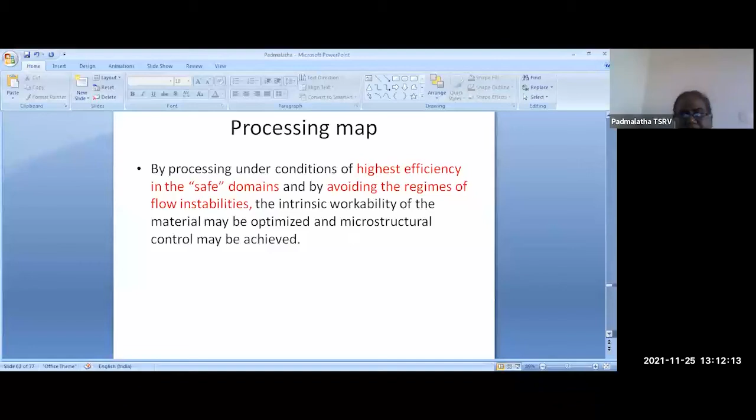We'll quickly go to that point. We saw that flow stress is decreasing with strain, and we thought it was recrystallization that had occurred, but actually what is happening at higher strain rates is not recrystallization of the entire grain structure, but localized recrystallization, which has led to the flow softening behavior. So this flow softening behavior is actually generating defects.

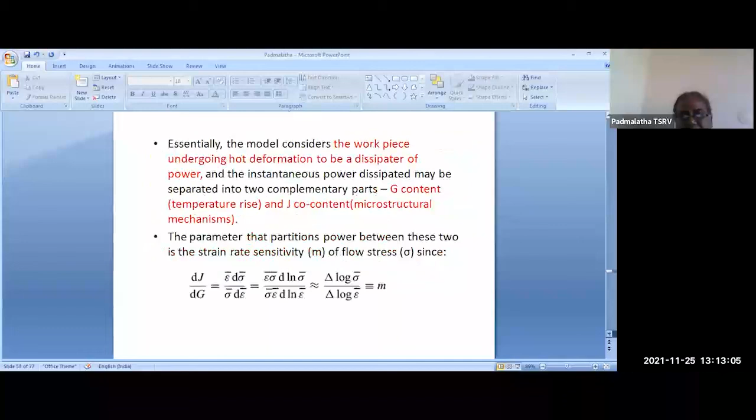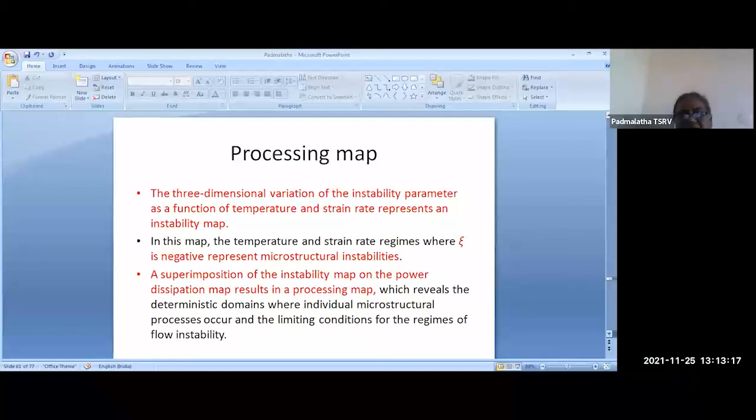This we can see not only by microstructures but also by using processing maps. So it is better to convert our flow stress data into processing maps, because processing maps relate well with the microstructures. It is good to analyze the flow curves, but after analyzing them it is better to generate a processing map from the flow curve data. At higher temperatures, we can see it showing an instability region, so this and the microstructure both work hand in hand. It is better to convert into processing maps and then check the validity of the processing maps using microstructures.

Here we can see the flow localization happening here and here, due to which flow softening is taking place. But this flow localization is not good for us, because it has happened only in certain regions, not the entire region. That means it is an instability, and instability always tells us it is not a safe zone. We should avoid these zones.

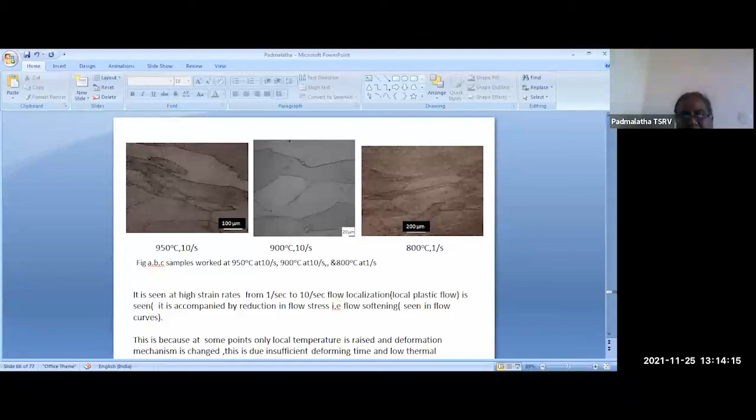So from hot working behavior, I can only tell that, since our time is nearing, it is better for us to take the flow curve data and convert it into a processing map, and we can use this processing map and validate it using optical microstructure studies. These processing maps are very much used; there is almost a very huge book on processing maps, and they have developed processing maps for almost all the alloys.

Almost, because if you just go to the processing maps, it will give the safe and unsafe regions, and they have even validated using the microstructures. So it is better to understand the hot deformation behavior using processing maps, because processing maps go hand in hand with the microstructural changes, and that is a better way of analyzing the deformation behavior.

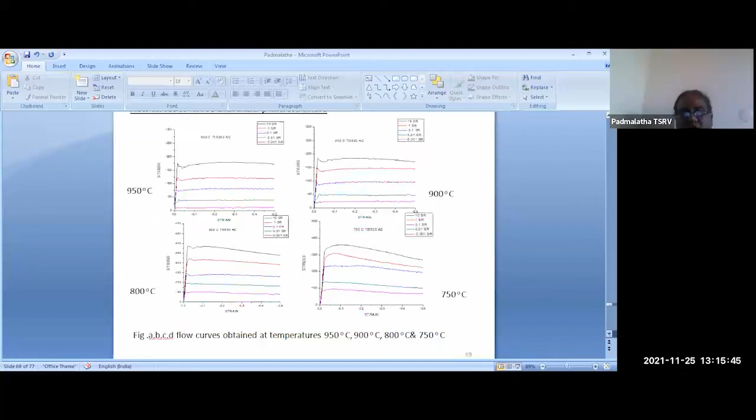There are so many microstructural changes that occur during hot deformation, so sometimes the processing maps may not give the proper information. So it is always better to validate the processing maps using optical microstructures.

If this phenomena is happening inside the material, it means it is a safe zone. These domains, at 900 degrees and 0.01 strain rate, are safer for us.

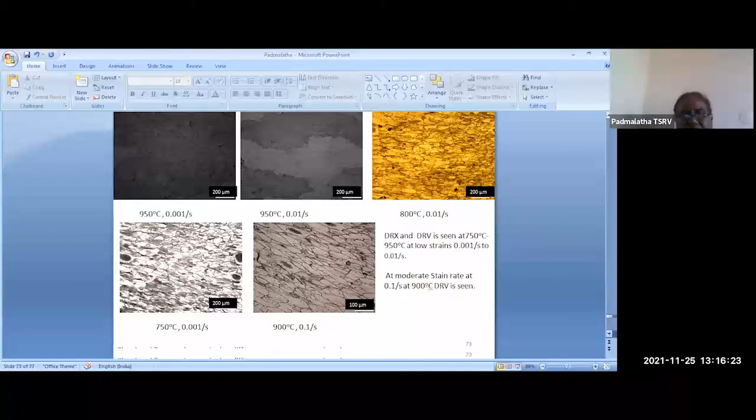But when we go for higher strain rates, we can see that flow localization is taking place. Not only flow localization, cracks may come up, or some deformation bands may occur. So many different types of instabilities are there, and all those can only be seen by studying the microstructure.

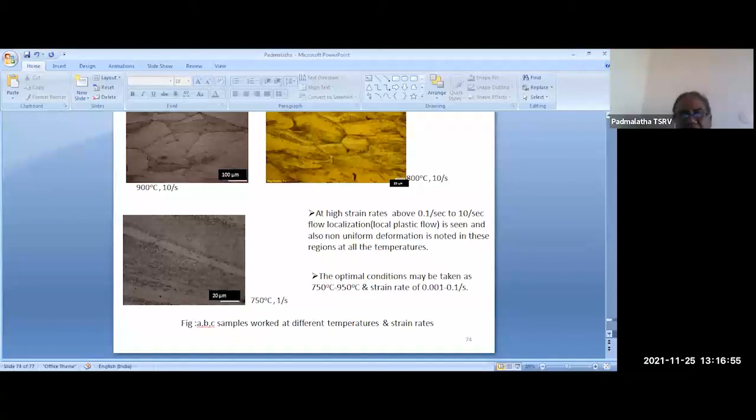The processing map will just indicate the instability, but if we want to check what type of instability, we have to go for microstructure only. Without microstructure, we cannot see what type of instability it is.

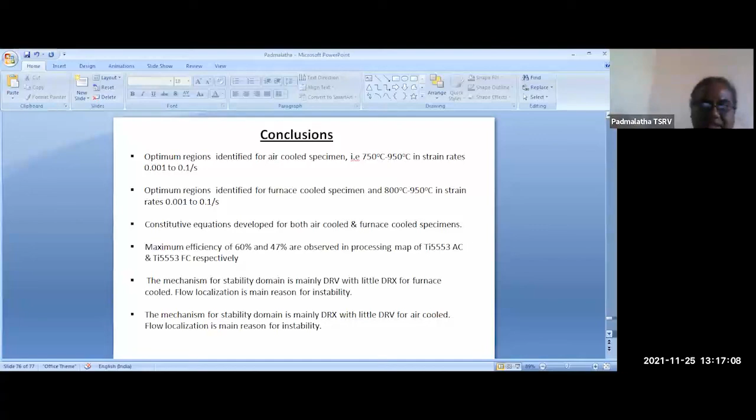I just tried to cover the hot deformation behavior so that if anyone is interested in this area, they may have a preliminary knowledge on this. And these are all our conclusions from our PhD work.

I don't think these may have much use for you, but the thing that is useful for us is how to work in the hot deformation area and how to work in the cold working area. For cold working, we can use workability limit diagrams, and for hot working, we can use processing maps.

These two areas - hot working is always a green area for research. However much people work in this area, there is always scope for research in hot working behavior. Thank you one and all.